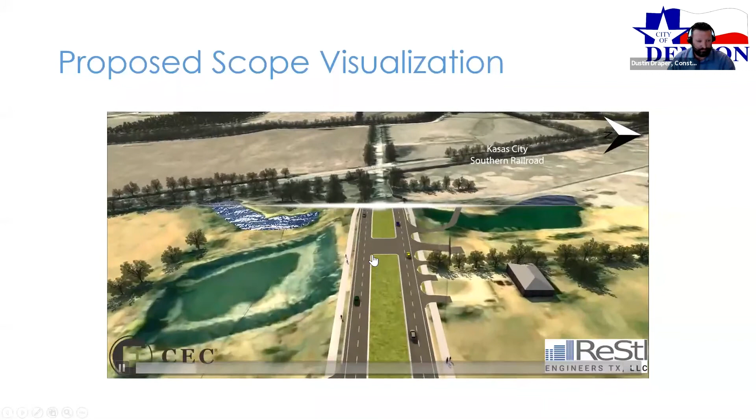As you can see right here, the bridge begins, and this is where the bridge starts for the Hickory Creek 3 project. This is the original road that comes in and curves around—this is the 90-degree curve where we have addressed the safety concerns. All of this is elevated bridgeway.

You can see as we're going over the top of the road, this is the original road coming through along the right side of the screen, curving around and leaving the screen. The road up ahead of us is right here at Hilltop, where we'll tie in. As you can see, right about here is where the bridge ends and we go back to a ground-level roadway. You'll also see that it has a bike path and sidewalk on both sides, leading up to the bridge.

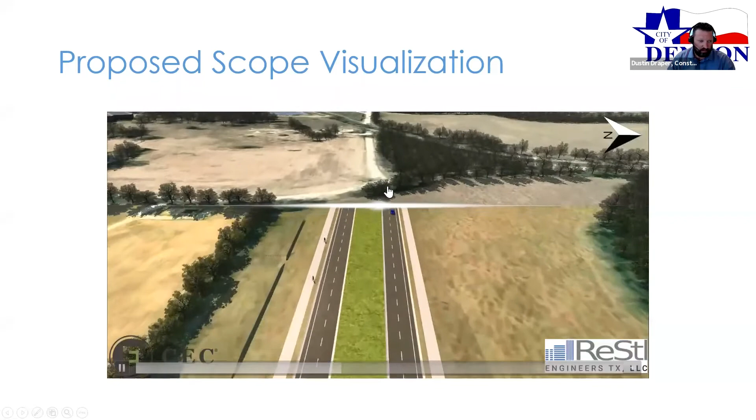And here's where we make the tie-in with what was originally Hilltop, now on the road that cuts back to the south.

And our final tie-in right here at Country Club Road.

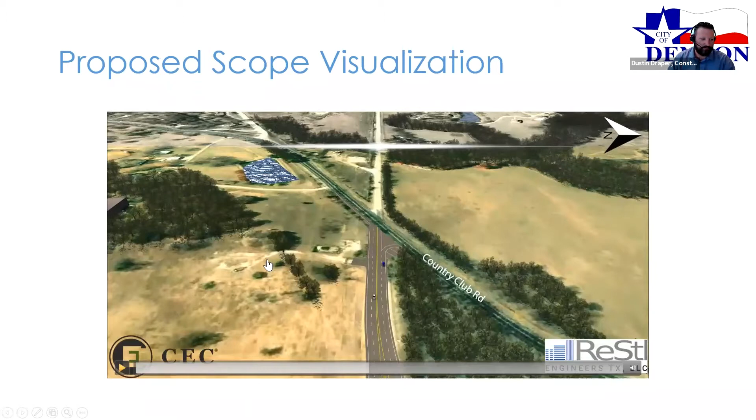We always ask that you go to our website at cityofdenton.com for the most up-to-date information, under the Hickory Creek 3 project.

That's www.cityofdenton.com/Hickory Creek Road Phase 3. You can sign up to receive email alerts as the job progresses. When you send an email to that same address, it also sends me an email that I can reply back to for any questions you may have.

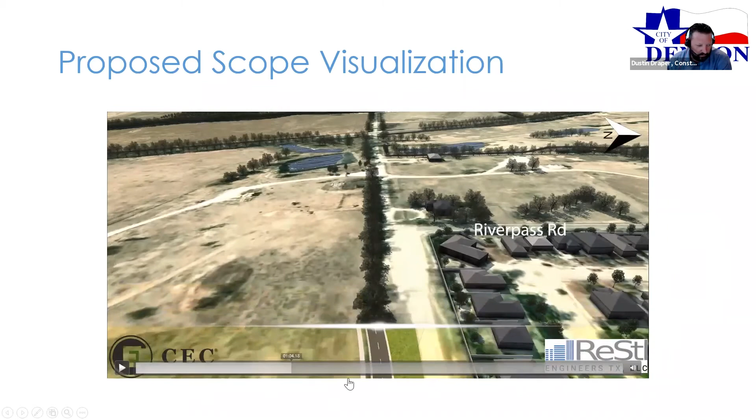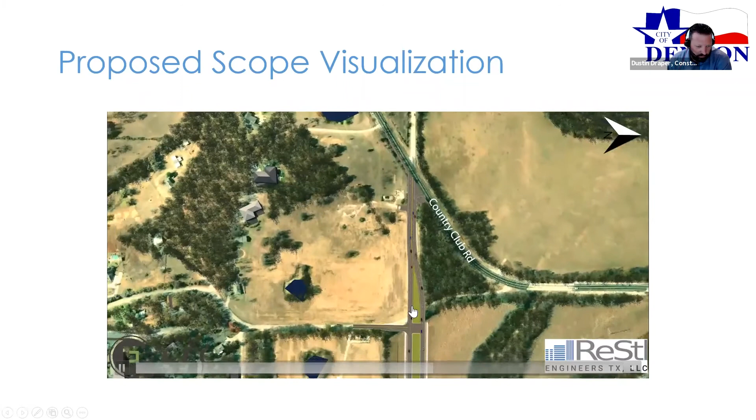So right here is where Country Club is. Hilltop Road originally goes right through here and cuts right back through here at the moment. This is Hilltop Road to this section here, and this is also Hilltop Road going back to the south as well.

And then the old Hickory Creek Road will remain, but resident-only access. It will be gated at both ends.

Ms. Boudwell, Ms. Deborah asked about an alternate route to go through Thistle Ridge or Teasley. During construction, Thistle Ridge is up to the north. We are investigating every option on alternative routes.

While this is under construction, the piece from River Pass to where the old road meets Country Club will be closed down. Most people will be asked to go over—we're trying to use Ryan Road as an alternative route. There is a future project at Ryan Road, but it won't start construction until Hickory Creek Road Phase 3 is completed.

Will there be an in-person meeting scheduled any time in the future, Mr. Calvert asked. We're still hosting everything virtually—nice way to say it, sir—in this post-COVID world.

We will have some future meetings with individual property owners for sure. As far as community meetings go, as we get closer it would depend on protocol at the moment, whether we'd have an actual in-person meeting as opposed to virtual. We've learned through COVID that we like virtual because it allows us to reach more people, but we are moving back to a more normal style setting.